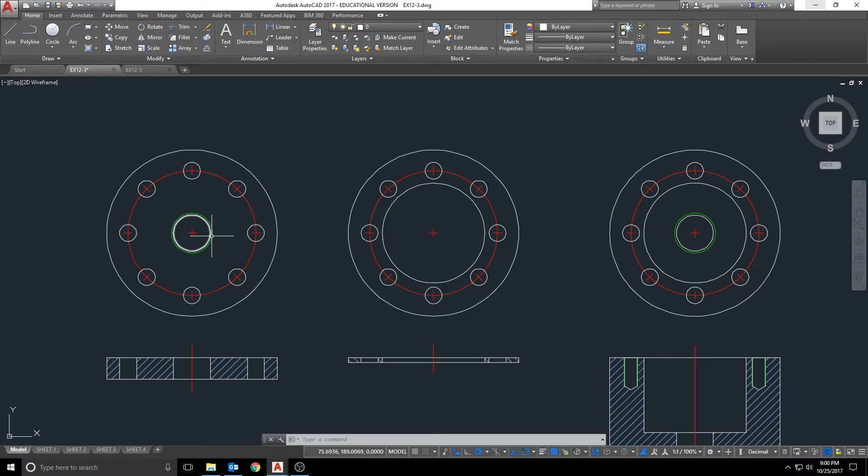This view here is really just a combination of this view and this view, with the section views being a little bit different.

The other important thing to note is once you have these three things, all you have to do is move them on top of each other and you have your assembly view once you put in the bolts. In an assembly view, when you have two mating parts that are sectioned, you want to use an opposite hatch pattern for the two parts that are touching so there's no confusion.

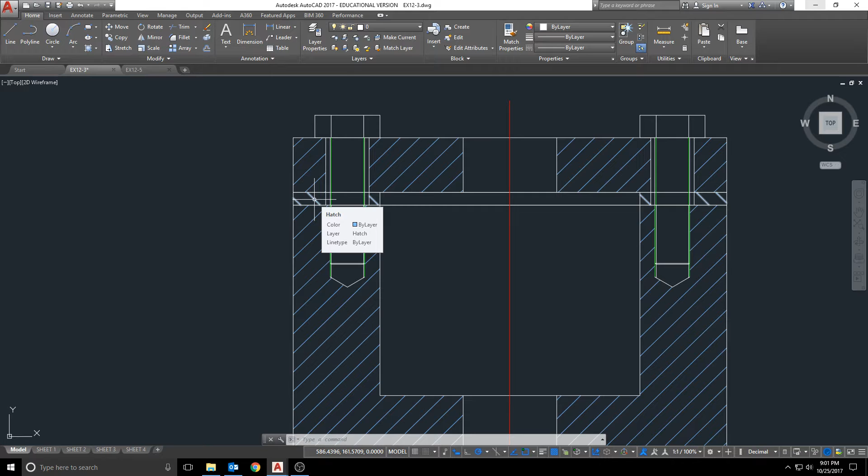To get this opposite hatch pattern, you just put in the same hatch pattern, but when you click on it and the hatch editor comes up, you have the option to change the angle. I changed this to a 90-degree angle so that it was opposite of the 45-degree angle that the ANSI 31 hatch pattern uses.

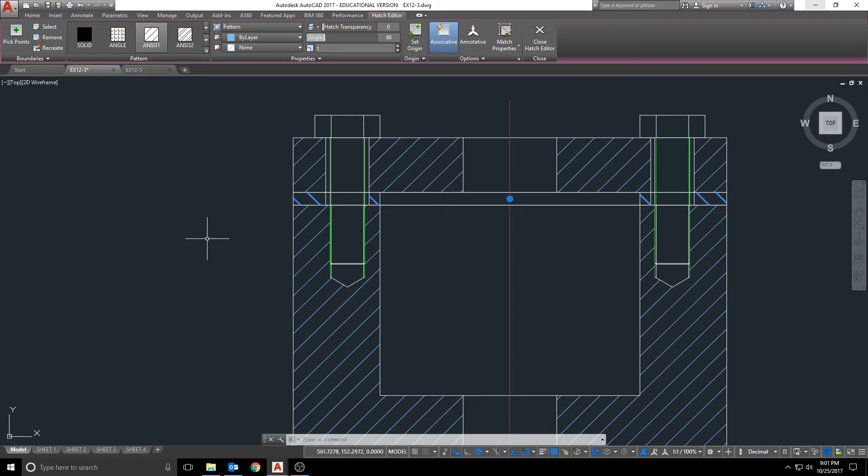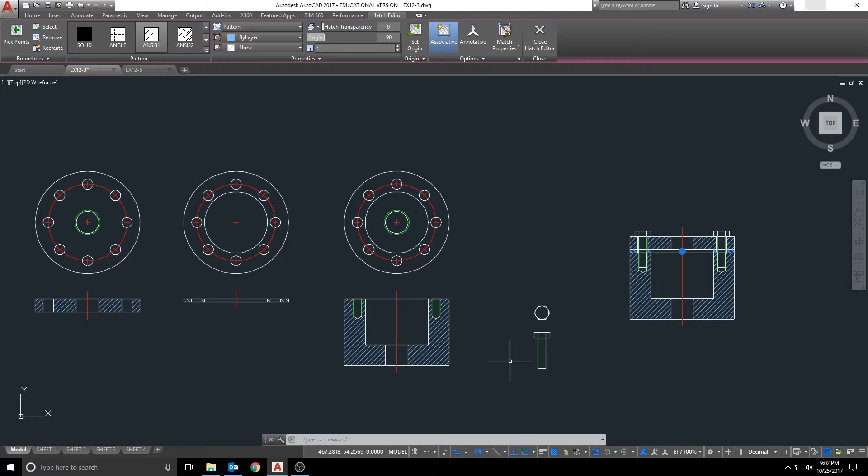The other thing I've done is used a simple representation for the major diameter of the inside threads, and the bolt is only drawn for illustrative purposes in the assembly view. This is a standard piece, so as long as it's called out as what it's supposed to be, it doesn't really matter whether it's drawn 100% accurately, because this is something that's going to be ordered anyway.

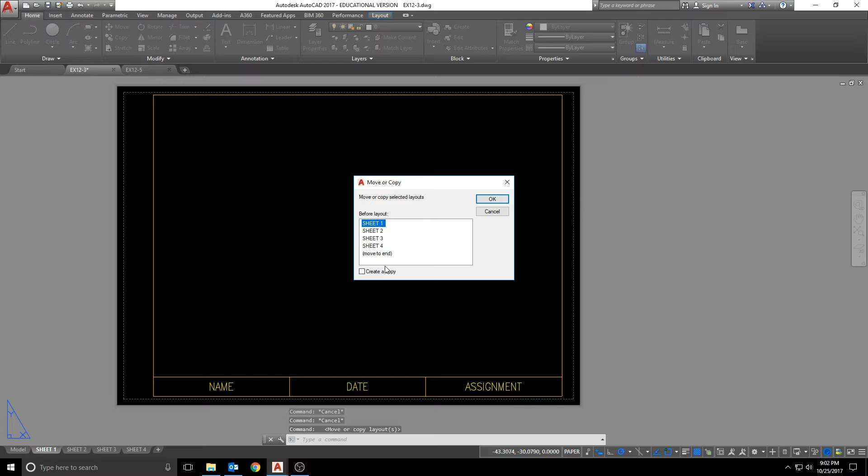The other thing I've done is created 4 sheet tabs down here. Each one is a blank sheet tab that has my border in it on the template. The way I did that was right-click on the first one, go to Move or Copy, click Create a Copy, move to End, and hit OK.

Then I can go to these and hit Rename, and if I had a sheet 5, I would just put in sheet 5. But since I don't have a sheet 5, I can right-click on that and hit Delete and say OK to that dialog box. So Layout 2 was the tab I wasn't using, and I just deleted that one off my screen.

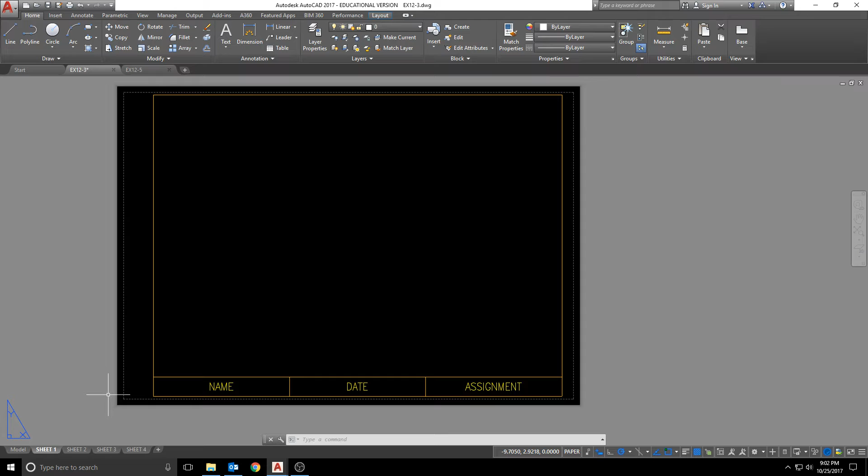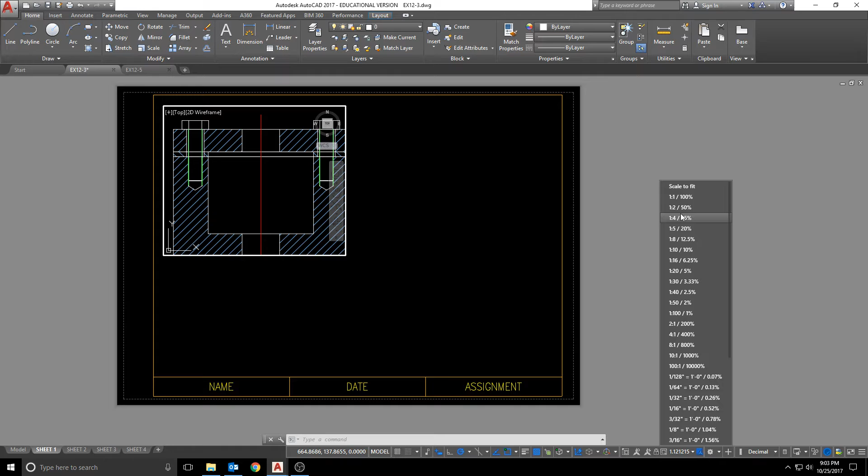So for this particular view, I want my first sheet to be my assembly with my list of material. To put this in here, I'm going to go to MV for Make Viewport, make a viewport up here, double click inside it, and zoom in on what I want in that viewport. It looks like I can get a scale of 1:4 pretty easily with this. Now I'll double click back outside the viewport and adjust it so I can see everything clearly.

At this point, I'm going to verify that it's still a scale of 1:4 and hit the lock button, and then change my viewport to the viewports layer. I'm now going to switch over to my text layer and create my table for my list of materials. So once I'm on the text layer, I'm just going to click on my Annotate tab and click on Table.

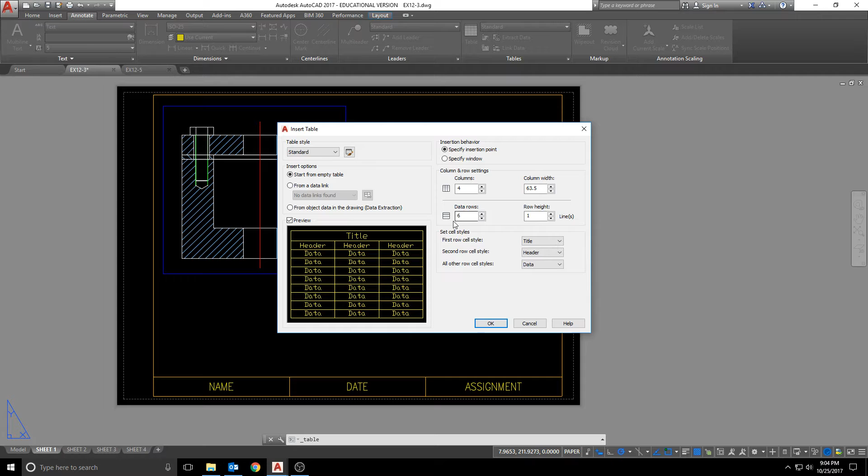I want 4 columns because I'm going to do ID number, quantity, name, and material. And there's 4 parts, and I like to have a couple of extra rows at the end, so I'm going to go with 6 rows. And I'm just going to go ahead and say OK, and then drop my table in right here. For the header, I'm just going to put list of material.

And then I'm going to use tab, and I'm just going to go through and fill out the whole thing now. So this is going to be my ID. This is going to be the quantity. This is going to be the name. This is going to be the material. So item number 1, I'm going to make my base chamber, which there's 1 of. And the material for that is going to be steel.

Item number 2, there's 1. I'm going to make this my cover plate. That is also steel. Item number 3 is a quantity of 1. And I'm going to make that my gasket, which is neoprene. Item number 4, there's a quantity of 8. And this is going to be my M8 by 1.25 by 30 long hex head bolt. And these are also steel.

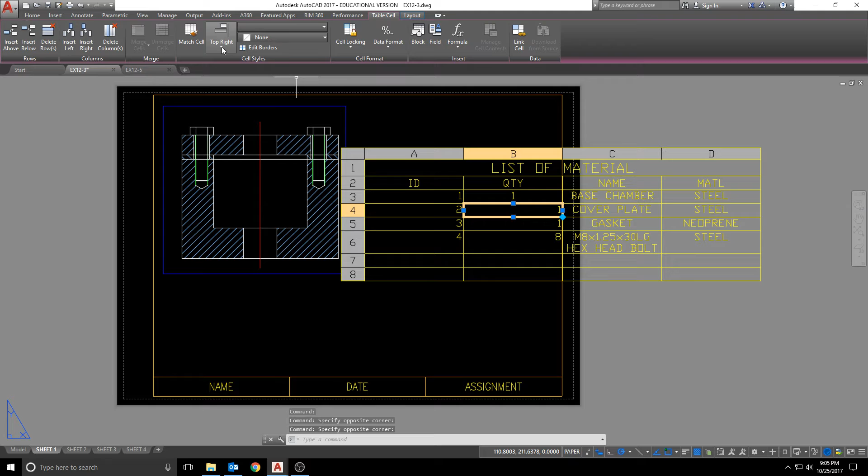So now once I have all that in, why this one decided to go with a top right justification instead of a top center justification, I'm not sure, but we're going to go ahead and just make everything in the quantity column a top center justification, just for consistency's sake.

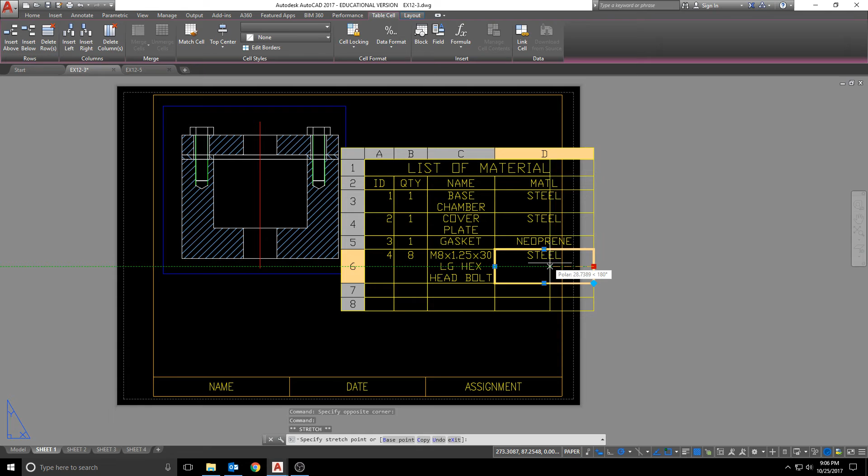So now once I have this, obviously this doesn't fit on the sheet that I have right now, but now I can come in here and I can shrink down this ID column pretty good. I can shrink down the quantity column pretty far. I'm actually going to shrink this down and it'll automatically wrap the text. And then I should be able to shrink this down just far enough to get everything on one sheet. So now I can just move this down here a little bit. And now I've got my list of material complete with the ID, the quantity, the name, and the material. And now all I have to do is label those parts over here.

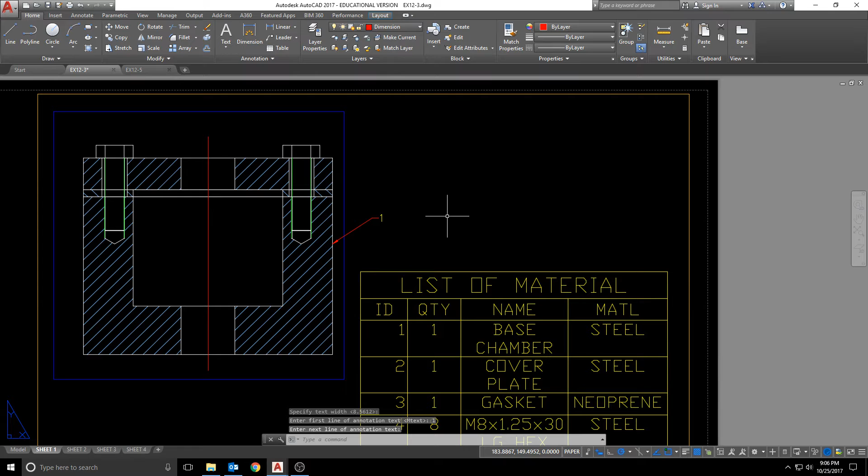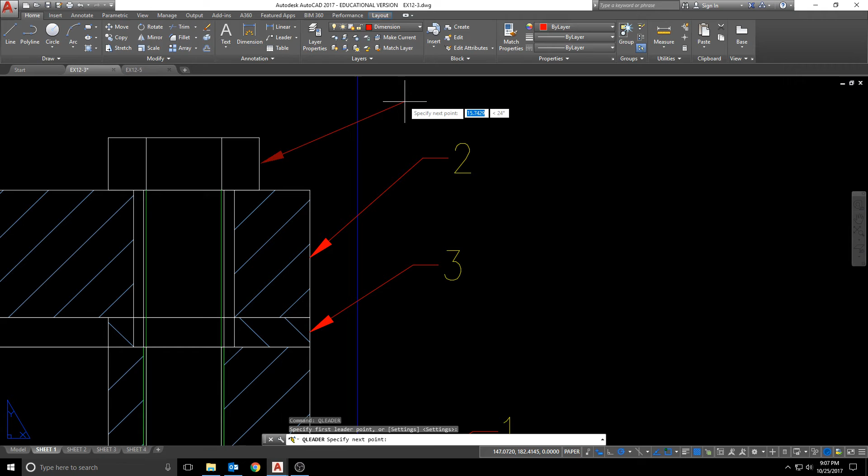So we'll go back to the Home tab and I'll switch to my dimension layer. And then I'll go ahead and use the leader command. I use LE enter for the leader command. This is part 1. I want to make sure that I'm grabbing this. This is part 3. Part 2. And part 4. So here we have our assembly view and our list of material with all of the information that's necessary for those 2 views. So at this point I'm ready to move on to my next sheet.

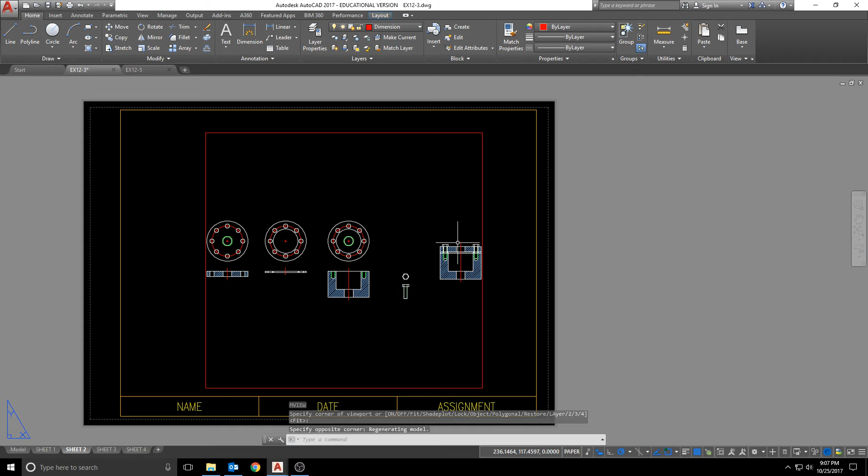And on sheet 2, the part that I want to put on here is going to be the base chamber. So I'm going to go MV enter. And I'm going to go ahead and draw my viewport. And I'm going to want to draw this one real big because this is where I'm going to be doing some dimensioning. I know I'm still on the dimension layer, but I can change that in a minute. Now, it doesn't look like I can get a 1-to-1 scale on this sheet, but I'm going to stretch this up here and I'm going to try to see if I can't get that.

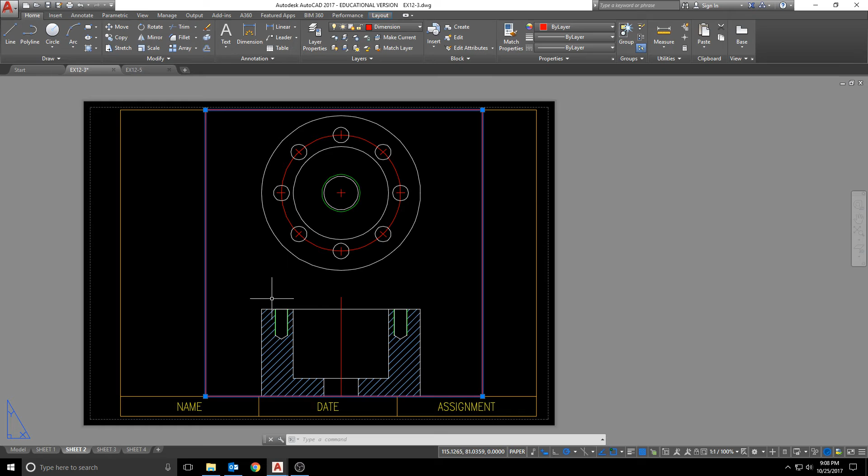Okay, so it's not going to fit in here at a 1-to-1 scale, but because I have a lot of dimensions and stuff, I really want to go ahead and use a 1-to-1 scale. So what I'm going to do, since I haven't put any labels or any annotations or anything on this yet, I can still modify this in the model without messing anything else up. This is the one that I've put leaders on, so this is the one that I absolutely do not want to touch.

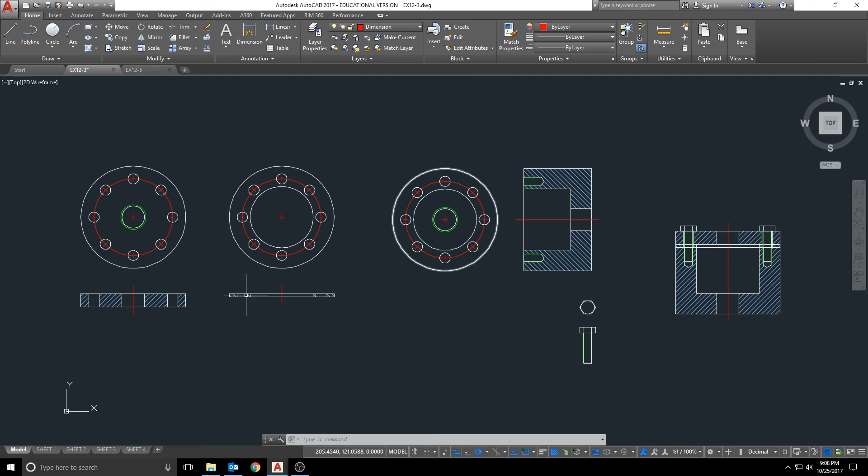So what I'm going to do is I'm going to rotate this thing 90 degrees in the model space. The top view doesn't change, but instead of a top and front view, it's now just a top and a right side view. So when I go back to sheet 2, let me double click inside of here, and it looks like I'll be able to actually get this to be in here at a scale of 1 to 1 using a top and right view. So I'm going to verify that that's still at a scale of 1 to 1. I'm going to lock my viewport and put my viewport on the viewport layer.

And now I'm ready to begin dimensioning. I can put all the dimensions that I need to on here. One thing that I do want to call out: in the book, it looks like these holes are centered between this hole and this hole.

But if you do this based on the dimensions in the book, the inside diameter for this is 60, the outside diameter for this is 100. So for these to be centered, they would actually have to be on a bolt hole circle of 80. But the bolt hole circle that the book uses is 75. So based on the dimensions, these are not centered. I know they look centered in the book, but we want to go based off of the dimensions, not necessarily what it looks like. So with that being said, this is ready for dimensioning.

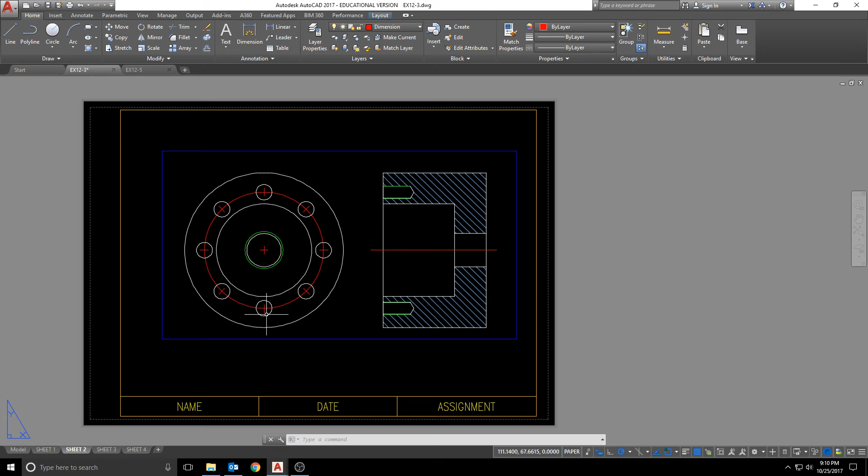We can call out the M24 for the center. We can call out the 8 holes here, the outer diameter, the inner diameter, and then we can put in the depths and everything that we have here. The one thing that I do want to talk about is these holes right here. This is the one thing that I'm actually going to put in the hole symbol for, because this one can be kind of confusing because it has a depth symbol. Now, there's 2 ways we can do this, and I'm going to show you both.

I can go to the LE command and bring a leader off of here, and I can type in M8 by 1.25, 17 deep, eight holes. And I can do it this way.

But doing it this way, every company has different standards, and using the word deep on here isn't really something that you're going to find a lot of companies doing. So the depth symbol is something that we want to learn to incorporate, and there's a way that you can do it. I'm going to double click on this because it's an mtext object, so I can do anything that I want within mtext. So before the 17, right here is where I want to put my depth symbol.

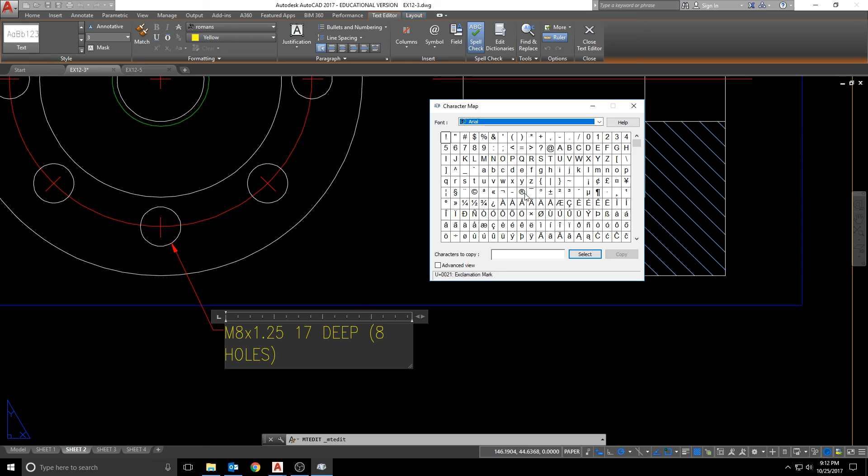I'm going to come up here to my symbols, and we can see here's all of the normal symbols that we have for the system. I want to click on Other, and that's going to open up the character map for Microsoft Windows. This is a Windows function, not an AutoCAD function. Now I want to come down here to the font for GD&T. And it should be on everybody's computer because GD&T gets installed with AutoCAD.

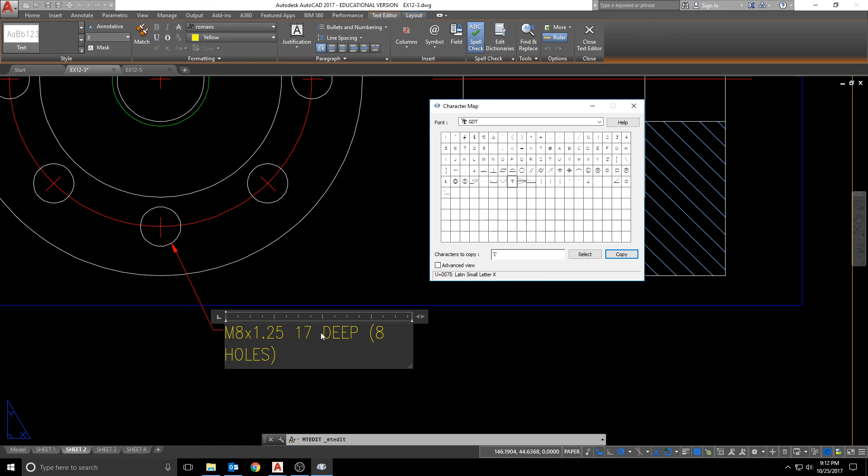Once I go to GD&T, right here is my symbol for depth. I can double click on that, and it's going to come down here. I want to click on Copy, and then I can come right over here and click on Paste. That's going to put in that symbol, so now I can remove the word deep and close my text editor. So now I've got the depth symbol, so I don't have to put in anything else.

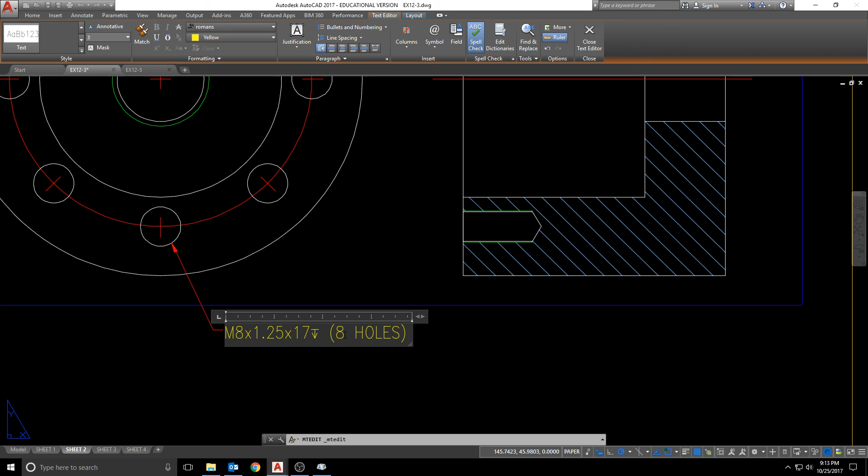And the best way to actually call this out would be to put in the X by 17 and then have the depth symbol after the 17 and then 8 holes, or I could put typical or something like that. But that's really the only annotation on the base chamber that's going to give anybody any problems, that depth symbol. So that's how we put in the depth. The rest of the dimensions I'll leave up to you guys.

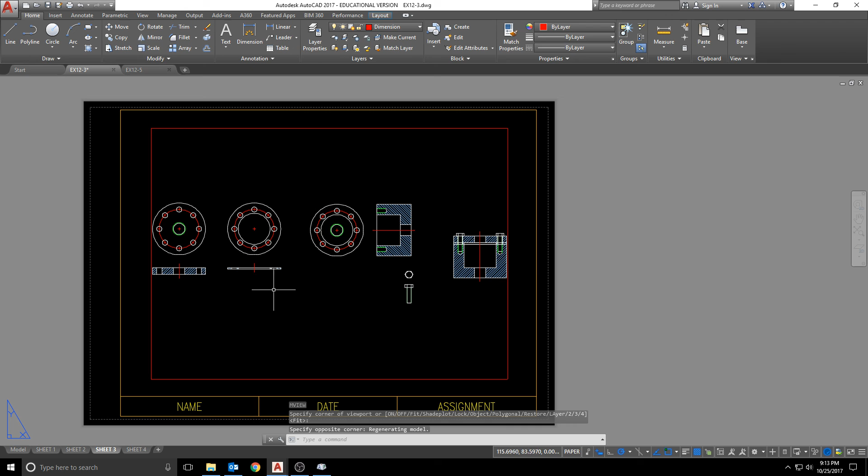I'm going to go to my sheet 3, MV enter to make my viewport. We'll draw my viewport in here. I'm going to double click inside, zoom in on that view, change the scale to 1 to 1. Double click outside and then click back on this, shrink this up so that that's the only view that's visible. Verify that it's still 1 to 1, lock it, and put the viewport on the viewport layer.

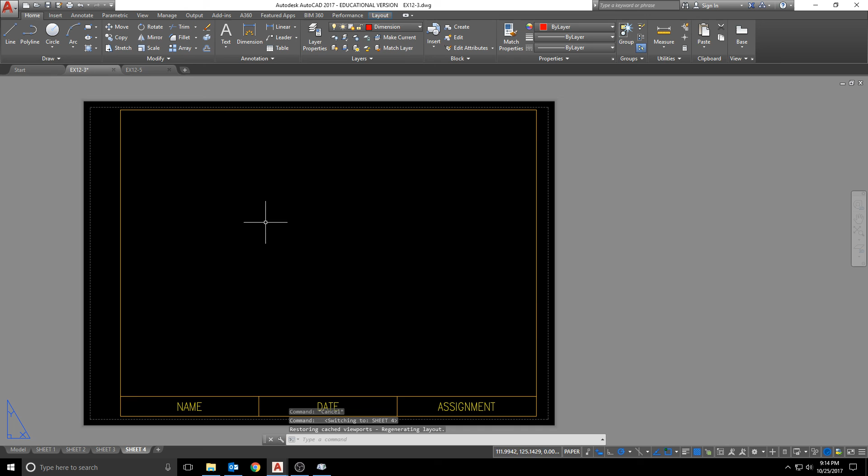Go to my sheet 4, MV enter, draw my viewport, double click inside, zoom in on the gasket, change the scale to 1 to 1, double click back outside, adjust the size of the viewport, lock it, and put it on the viewport layer. So there we've got the 4 sheets for the drawing.

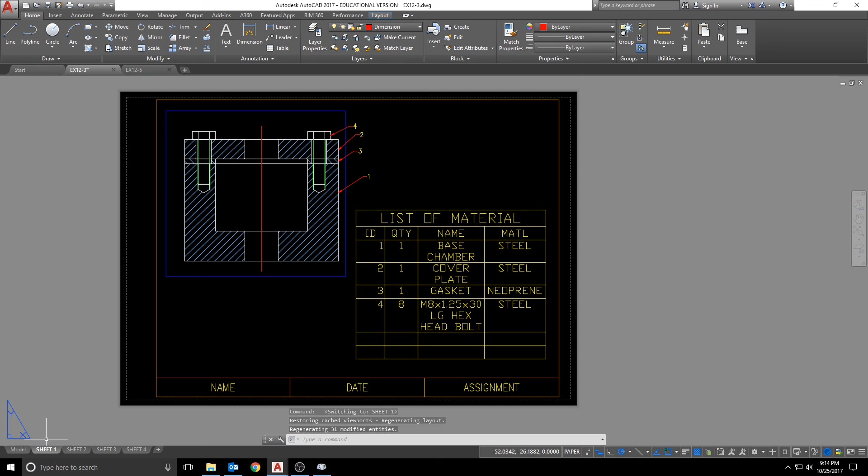We've got our sheet 1, which is our assembly view, our parts list, and our item IDs. Sheet 2 is the base chamber, sheet 3 is the cover plate, and sheet 4 is the gasket. Once you're done with all the dimensioning on each of these parts, what you have is a true working drawing with your assembly view and all of your detail views, and then you are ready to submit this one.